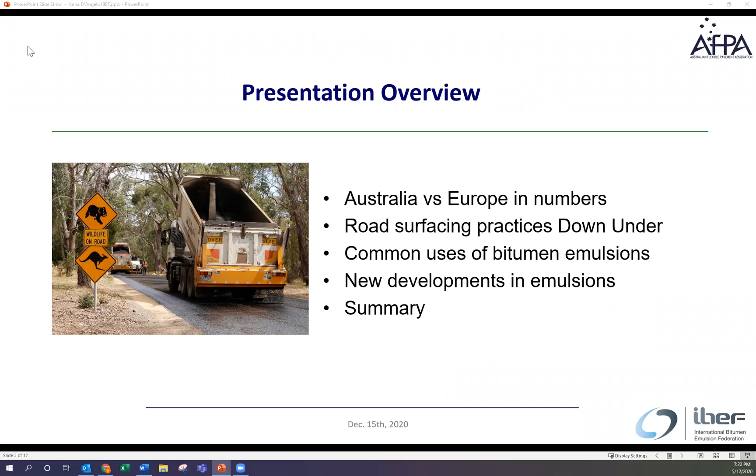In my presentation, I will start with a comparison between Australia and Europe and present the current road surfacing practices in this part of the world and touch on the common uses of bitumen emulsions and some of the new developments that could potentially increase the use of emulsion.

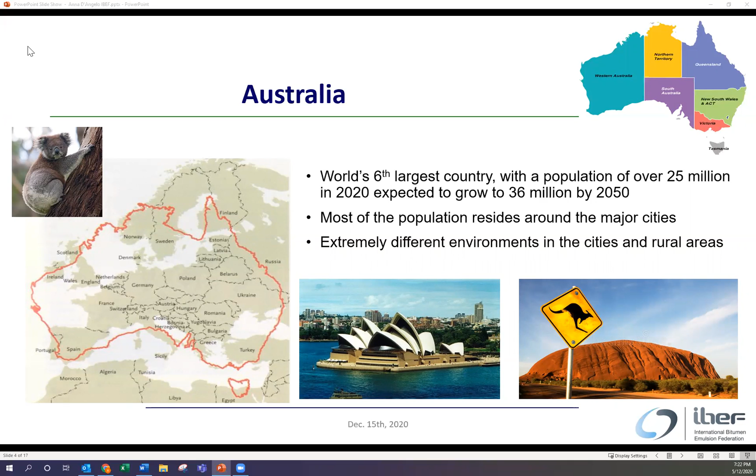Let's take a look at Australia. Australia is quite a large country. It is actually the 6th largest country in the world, with a population of over 25 million in 2020, and this is expected to grow to 36 million by 2050. The majority of the population resides around the major cities, and there are extremely different environments in the cities and rural areas. In this other slide, I just put additional information to compare Australia to Europe, and especially from the map on the left-hand side, you can have a sense of the size of the country.

There is an extensive road network of over 800,000 kilometers and extremely long distances between population centers. The majority of all motorways and arterial roads are controlled by state government. Local roads make up over 680,000 kilometers of roads, or 80% of the road network, and are controlled by relevant local government authorities.

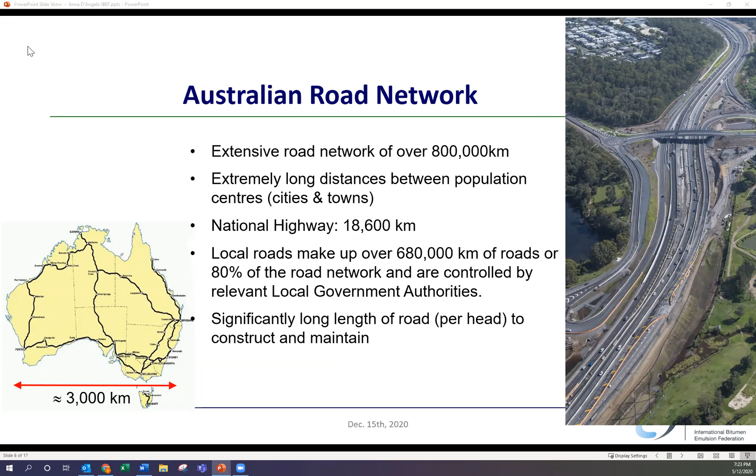In regards to the bitumen use, we use 900 million liters of bitumen each year, and the majority is now imported from overseas. And there is only one refinery still producing bitumen, which is located in Geelong in Victoria. Now, based on the Australian petroleum statistics, there has been a decrease in the volume of bitumen imported during 2019 and 2020, and this decrease is estimated to be around 10%.

In regards to the volume of bitumen emulsion, this is estimated to be around 10% of the bitumen, and the emulsions are produced by 15 emulsion plants distributed in the country. Now, considering that the majority of bitumen is imported from various sources, there is a need to monitor the impact that the variability may have on the performance of the emulsions.

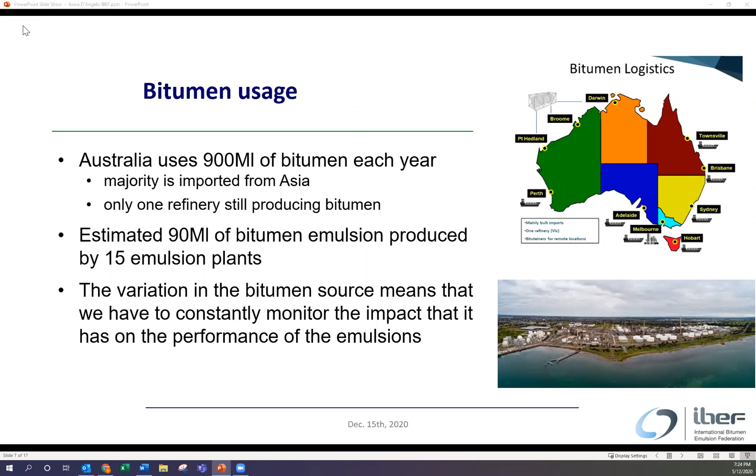Over 80% of the surfaced road network is sealed with spray seals, and the majority of spray sealing operations uses hot binders cut back with kerosene. Polymer modified bitumen and crumb rubber bitumen are also extensively used. And synchronized spraying and aggregate spreading is used, and this technology provides a way to reduce the use of cutters. Overall, there is a limited use of emulsions in sprayed seals, mainly due to the long haul distances and the low cost of constructing spray seals.

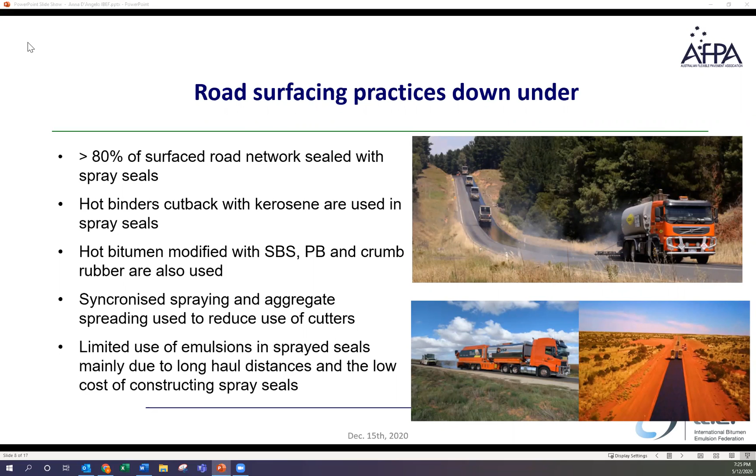I'm now going to move on to talk about the bitumen emulsion applications, starting from new constructions, where emulsion can be used as the initial treatment. For example, in new construction, we spray emulsion primes on granular bases and concrete bridge decks. We spray a cationic rapid set emulsion as a tack coat under new asphalt. And we construct spray seals in winter with standard emulsion for low trafficked roads, or SBS modified emulsions on medium trafficked roads.

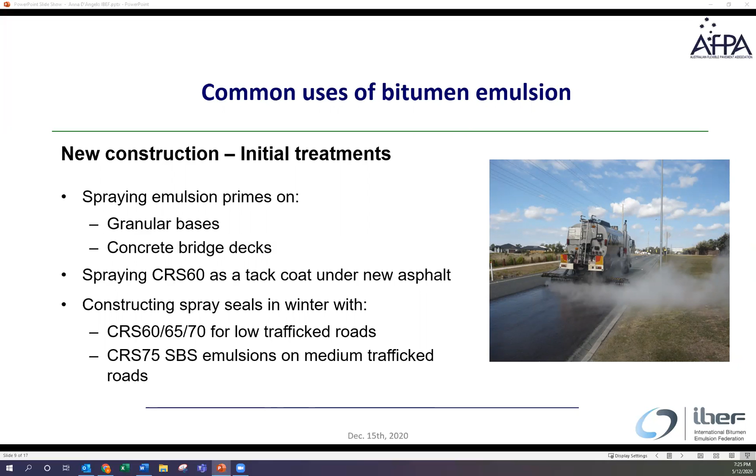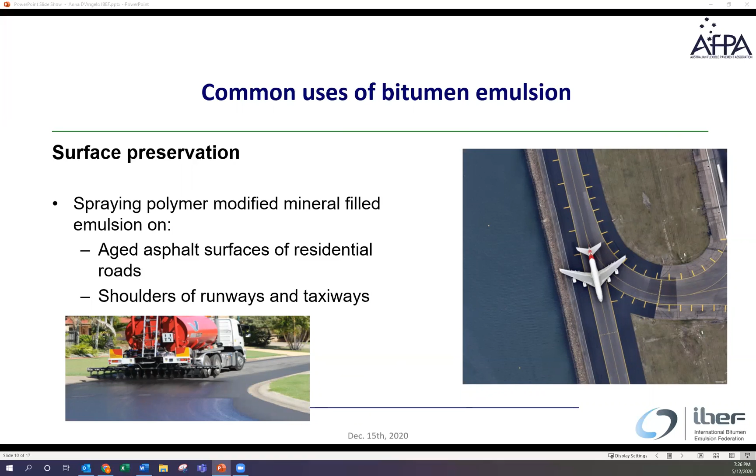Bitumen emulsion is also used in surface preservation treatments, that are generally applicable to low traffic sites or aged asphalt surfaces to extend the life of the surfacing by ensuring the retention of existing cover aggregate. So essentially, these treatments are normally used on roads which are overall in good condition, apart from aged binder, where there is a risk of aggregate loss.

Microsurfacing is another treatment which is used as an alternative to sprayed sealing or asphalt, where a non-structural wearing course is required, such as for pavement preservation strategies, or where a dense graded asphalt type surface is desirable at minimal cost. For example, in low traffic residential streets, where a spray sealing type surface could be appropriate from a design perspective, but not acceptable due to traffic noise.

So microsurfacing is also used for rut or shape correction courses, or also to construct cape seals. And this type of treatment provides a very robust surfacing. It has been used in rural areas to provide a surfacing with high shear resistance comparable to that of asphalt, but in areas where asphalt is not economically viable.

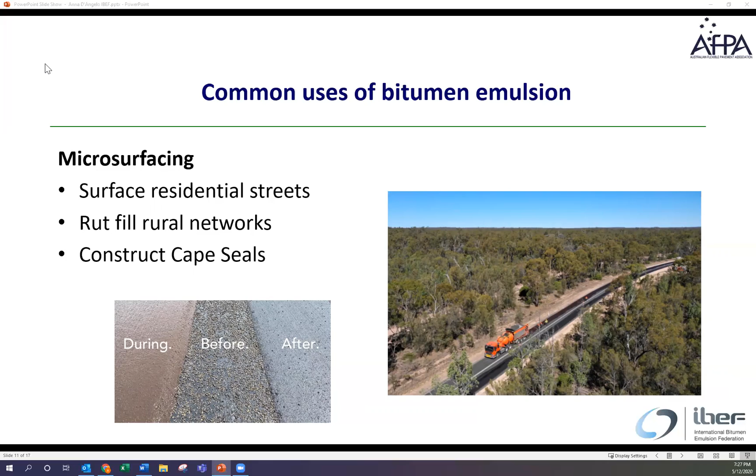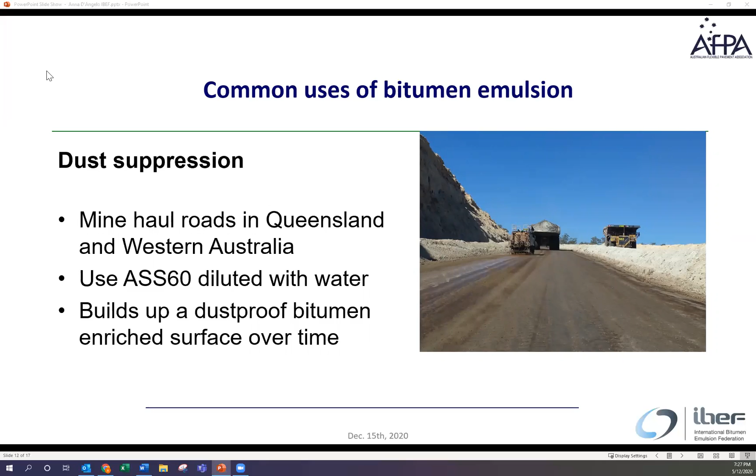Another common use of bitumen emulsion is for dust suppression, especially in the mine haul roads in Queensland and Western Australia, where we use anionic slow-set emulsions diluted with water, and this treatment builds up a dust-proof bitumen-enriched surface over time. Other uses that I would like to mention are for jet patching or as emulsion treated base course or fog sprays on airport spray seals.

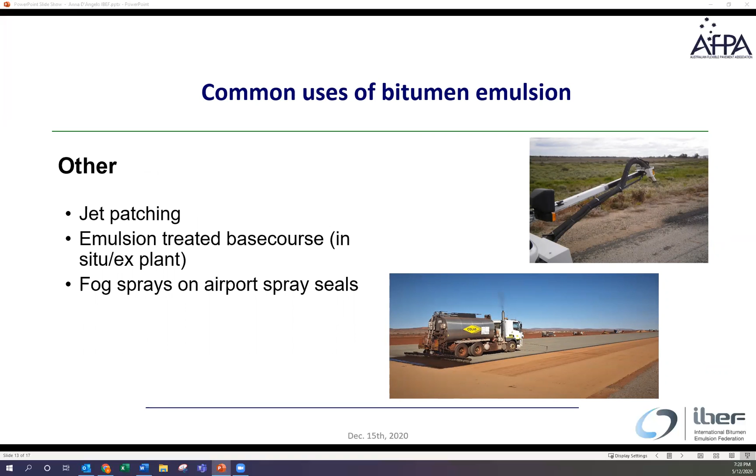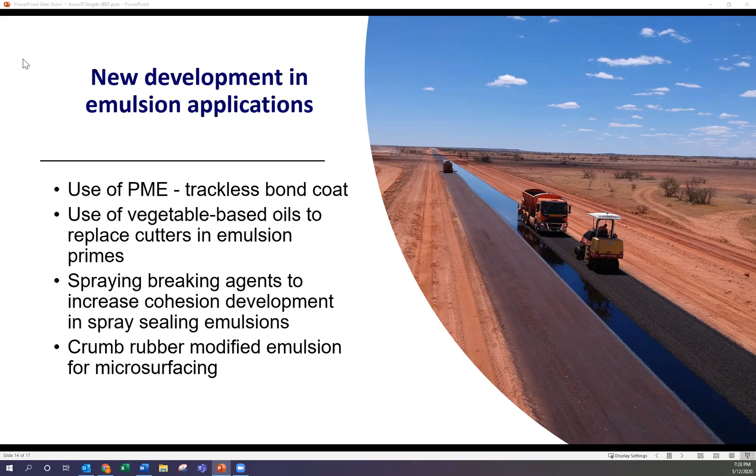In terms of the new developments in emulsion applications, I would like to mention the use of PME, polymer modified emulsions, for trackless bond coat, the use of vegetable-based oils to replace cutters in emulsion primes, and the use of spraying breaking agents to increase cohesion development in spray sealing when using emulsions. And also some members are working on the development of crumb rubber modified emulsion for microsurfacing.

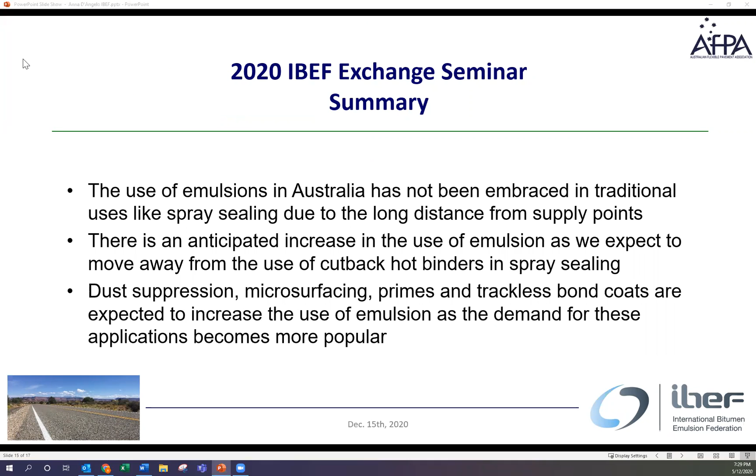Now, in summary, the use of emulsions in Australia has not been embraced in traditional uses like spray sealing due to the long distances from supply points. However, we anticipate an increase in the use of emulsions as we expect to move away from the use of cutback binders in spray sealing. And the other treatments that I mentioned before, like dust suppression and microsurfacing, are expected to increase the use of emulsion as the demand for these applications becomes more popular.